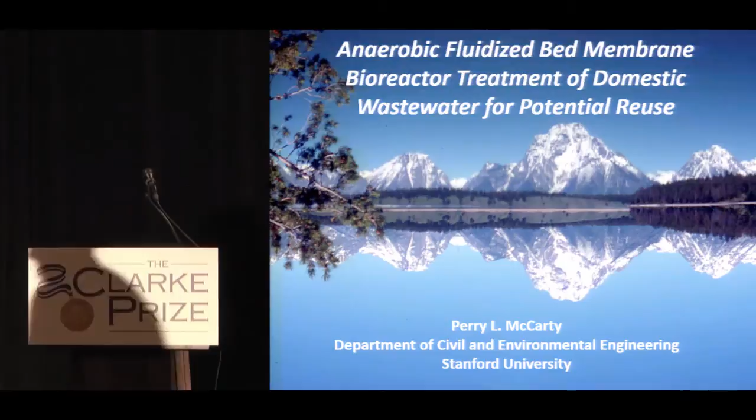Thank you, Pedro. It's certainly my real honor to be here to talk with you this afternoon. I want to tell you about the treatment plant of the future for wastewater. About 3 years ago, I had the honor of being here at the Clarke Prize conference to tell you about the beginning of this study on an anaerobic membrane bioreactor. We had been conducting laboratory studies. They looked very promising. We had started a pilot study on it at that time. And so now we've completed that pilot study. We have others beginning. And so I'd like to tell you about that particular one and where we're moving on this.

So George talked about the paradigm shift, that instead of looking at wastewater as a waste, it's very important in the future because of our limited world resources, growing population, and economic development, that we look on all our former waste as resources. And here we've been talking primarily about wastewater as a resource for water. But that's not the only aspect of the wastewater that's important. George also mentioned the bioenergy.

The aerobic treatment system we have today, and many of the advanced treatment systems that we're having, all keep on using more and more energy. But the reason we're having climate change is because we use so much fossil fuel and so much energy that we've got to change. That's where the big shift is. We've got to stop using energy. We've got to find processes and ways we can reduce energy. In fact, in this one, we produce energy rather than consume it.

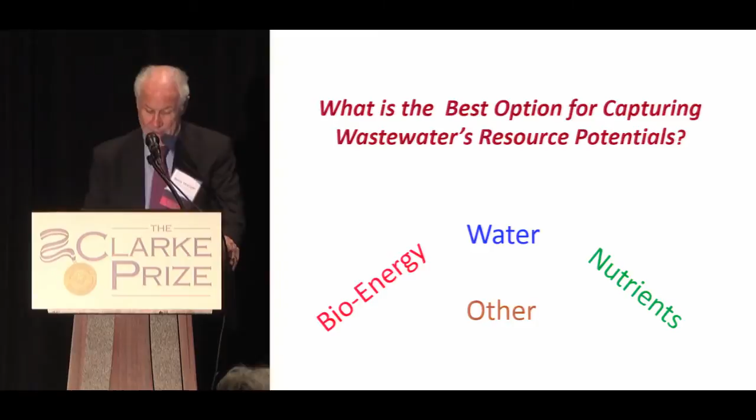Well, the process that we developed was with my colleagues and one of my former students, Jae-ho Bae in Korea, Inha University, who asked me to join with him and put in a proposal to the federal government. They had a program they called the World Class University Program, where they were funding senior people to come and work with them for a 5-year contract, which I did about 2 months a year.

And what is interesting, Professor Kim there, he came with, he's with membranes, and I got one of the students, Chungheon Shin, who's been so instrumental in so much of our work. I just wanted to make sure that his name was on that.

Well, something I'd always been interested in to see, well, we've been making great progress in anaerobic treatment. So now today, if you do an industrial waste, organic waste, a couple thousand milligrams per liter or so, if you don't use anaerobic treatment, you are wasting your client's money, you're wasting energy, and so forth. It is so much better than aerobic processes in all aspects.

But the question is, and the common belief has been, that you can't treat a waste anaerobically unless, in essence, it's in high concentration and at high temperature, and those are requirements that people said in the past. Well, there's a lot of evidence that said that we could probably do better, and the question that we asked is, well, how much better can we go? And can we really, if we make an effort, treat wastewater 100% anaerobically and achieve net energy production, while at the same time meeting effluent quality standards and at a lower cost than conventional aerobic treatment?

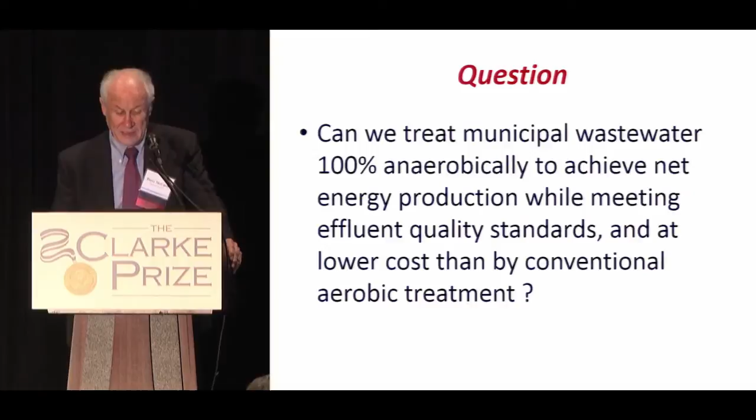Now, the process that I really liked is this one. There's a fluidized bed anaerobic treatment, and in here there's a little granular activated carbon, maybe a millimeter in size. They have recycled the water and fluidized the GAC, so it's floating in there. The bacteria find this is a great place to colonize. Now, the nice thing about that, you get this colony of organisms on the activated carbon, and you can put the wastewater very, very rapidly through, in minutes, and still keep the organisms, all of them, in the reactor. So this is the kind of process we need.

Now, this just happens to show 2 of them, full-scale industrial wastewater treatment plants in Taiwan. I just want to indicate it's a standard technology. There's nothing new here. All we're talking about is using it for a more dilute wastewater. There's several, actually, in Taiwan of this kind.

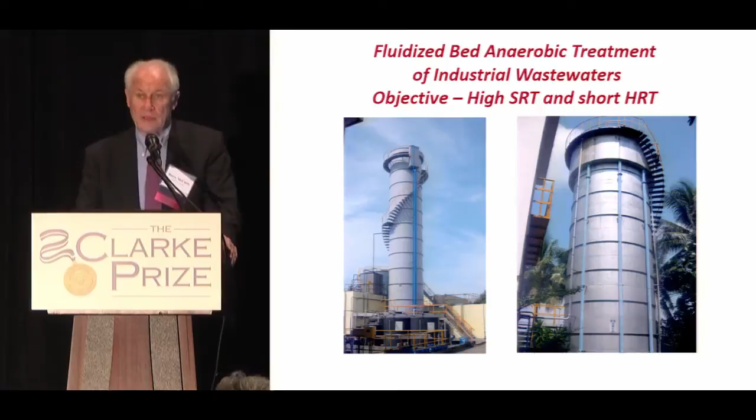So what we propose to do is to put it first, the one reactor on the left, is just that one. It's a conventional fluidized bed anaerobic reactor producing methane, bacteria growing on the little particles of granular activated carbon. And then we took the effluent from that, and since Professor Kim came, we said, well, we'll take one of these and put in some membranes and just see what would happen.

So in the second one, we put in the membranes as shown there, and the granular activated carbon was just rubbing against the membrane as it was being fluidized, and we found that this reduced a major problem, and that is fouling of the membranes, reduced it right away, and at a much lower energy cost than in the traditional ways of using this anaerobic system. So I just want to show a little bit about this.

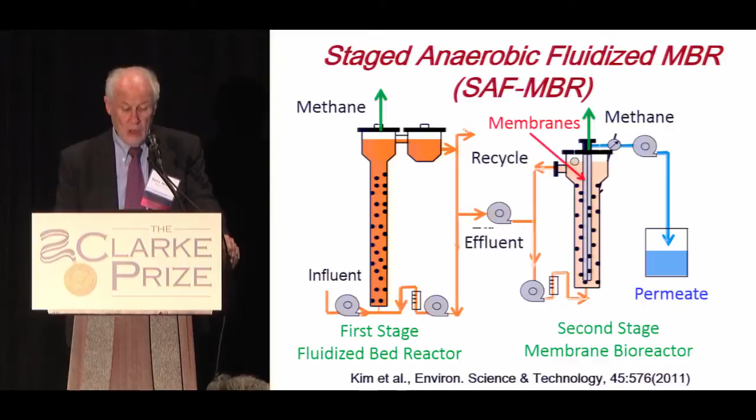Now, what's different here, that was the new concept, was that in traditional membrane bioreactors, they use gas sparging. This is where you put the membranes right in the reactor. And here, in aerobic systems, they use a lot of air. In fact, this is where the big energy cost comes from. A lot of air to shake the membranes. They prevent the fouling by just shaking them real hard.

In our system, which we call particle sparging, instead of putting all that air in, which is very high in energy, we just let the GAC, while it's holding the organisms and treating the wastewater, at the same time rub against the membranes, reducing energy.

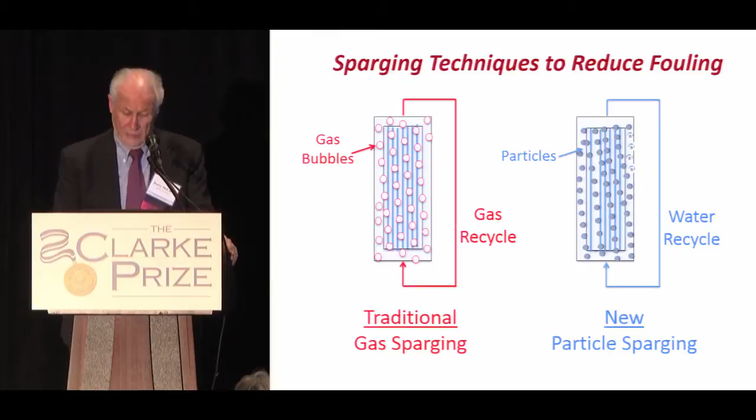So from our laboratory, we then built this at pilot scale in Korea, and the one on the left side there is the first reactor, the fluidized bed reactor with just the GAC in it. And the middle reactor is where we put in hollow fiber membranes with the GAC. So that was the second reactor.

Now on the far right there we just opened up the front of it so you could see the hollow fiber membranes inside. So in that reactor, we had GAC up to about the 50% point, and then we fluidized it to cover all the membranes.

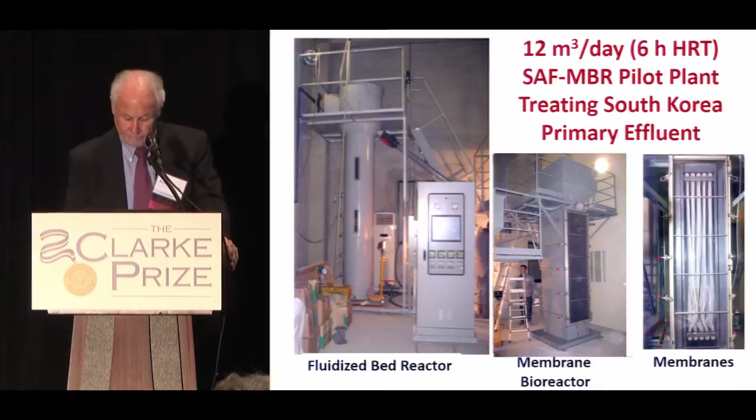We treated this waste at the Busan wastewater treatment plant in Korea. It's a very large treatment plant, and we took the primary effluent. So we're treating just the primary effluent. It had a COD about 300 and a BOD around 160.

And in the first reactor, we used a 2-hour detention time. And in the second one, we started about a 2.6-hour retention time. We ran it for 2 years. And over that period of time, we had no chemical cleaning. Now, chemical cleaning is a typical thing to do maybe once a month or so in an aerobic membrane bioreactor. We hadn't designed the reactor to find out exactly how to do that, so we ran it for 2 years

without any chemical cleaning. And during that time, the fouling got such that we had to reduce the flux through the membrane, so we increased the detention time. Nevertheless, the total detention time we're talking about is sort of in the 6-hour range, which is typical of an aerobic treatment system. The flow rate through the reactor here is about 12 cubic meters per day. So what do we get?

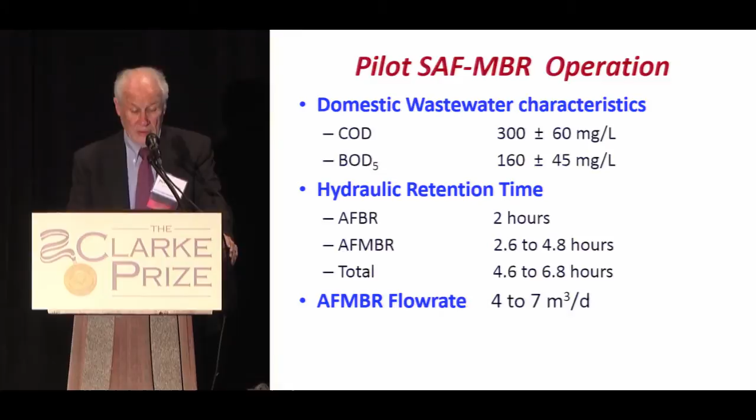Well, in Korea, this is the wastewater temperature, and it varies. At the top of this slide, you'll see a temperature range. So in the first little part, when we started, it was the wrong time to start an anaerobic system because winter was approaching, and the temperature of the wastewater dropped from 20 to 15 degrees. But we were just starting up the reactor. It takes a long time for the organisms to grow. Anaerobic organisms have a very long doubling time, especially when the temperature is lower. But nevertheless, probably a lot of this was initially some adsorption because we were getting almost 85% on average.

And then it dropped to winter. Temperature at the top you'll see is 14 to 8 degrees. We're getting about 85% removal. And then we come to springtime, temperature 15 to 25. We started getting increased efficiency, 90%. Summertime came in Korea, it's 26 to 32, and you see now we're getting 97%. Well, the summertime is required for the organisms to grow fast, get attached to the GAC in a nice large culture of organisms, and we got efficient removal.

Well, then we come to the next fall, and you see we're getting over 95% removal, and even in the winter when the wastewater temperature got down to 9 to 13 degrees, we were still at about 93% average BOD removal. So we see once you get it acclimated, even in the wintertime, which was actually a very big surprise to me as well as to all of us, we could still get such an efficient treatment process.

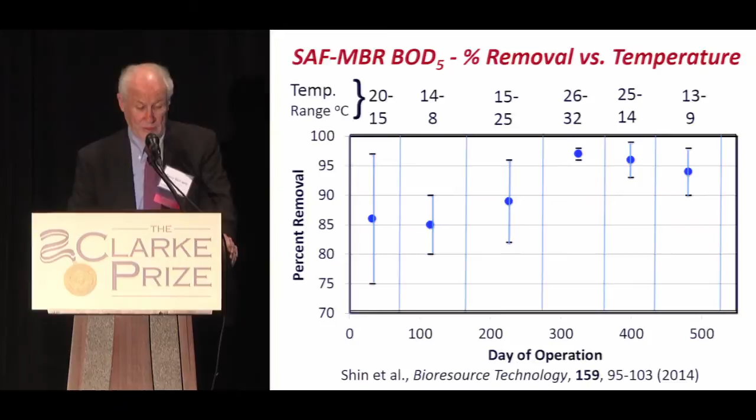And if we look at the effluent BOD, we can see the EPA standard here, the 30-30. Well, even when we started, we met that most of the time. But by the time we adapted through that first summer, and then went into the fall and the winter, we see over on the far right side that even in the wintertime with temperature in the 9 to 13 degrees, we still only had around 8 milligrams per liter of BOD in the effluent. So this is a very good quality effluent, short detention time.

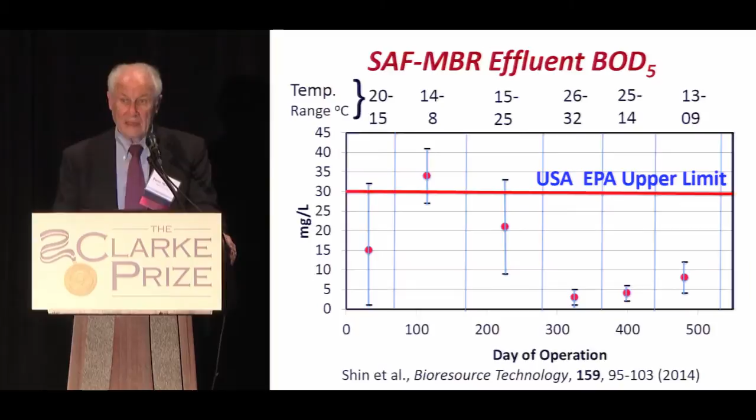So this is one of the big things. This is an energy neutral system, not putting any energy into it, and we're getting that kind of removal. But one of the biggest cost savings from this system is shown here in the biosolids production. Shown here, the anaerobic on the left, the aerobic on the right. Now they were both doing primary treatment, so the amount of sludge from primary treatment, shown in the blue, is about the same. But it's the secondary treatment.

Since most of the energy in the organics goes off as methane, there's little for the organisms to grow. So organism yield is very tiny. And the main problem with activated sludge is all the waste biomass produced. And it's very fluffy, it doesn't settle very well. We can see maybe about a quarter or 1/5 as much biosolids produced in that secondary process. So overall, anaerobically, we get about half the biosolids. In a normal activated sludge plant, biosolids handling is often talked about as being 40 to 50% of the cost. And here we've cut that in half. So I think this is one of the big cost savings besides energy.

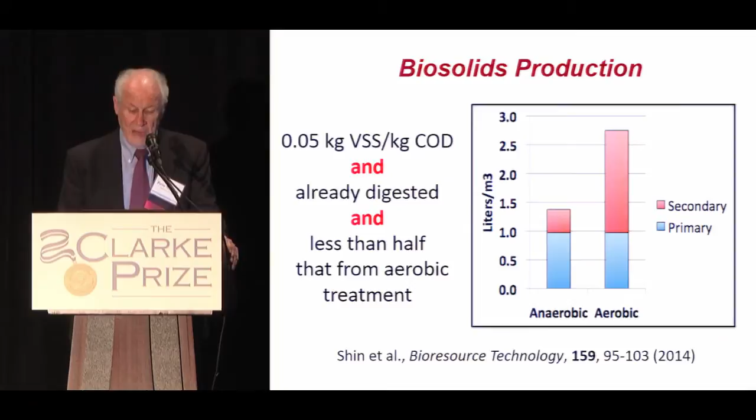Another surprising thing: Mitch at Stanford and Dave Sedlak at Berkeley were interested in looking at pharmaceuticals and contaminants of emerging concern, and what happened in the anaerobic systems, which obviously would be worse than aerobic. So from the full-scale, highly efficient aerobic plant at Busan, we got samples of the effluent there and the samples from here.

We got 96% median removal of the pharmaceuticals in the anaerobic system and only 76% in the aerobic. This is confirmed by some colleagues in Taiwan independently. Well, they did a similar study with the ones they found, and the simplest thing, we don't quite understand why it's removing. We've got a speculation, we've got to find out, but it was obvious when we look at trace chemicals of this kind, the anaerobic is doing very well.

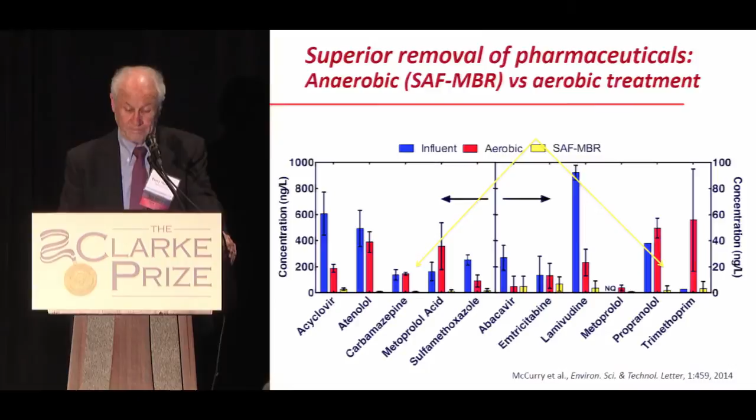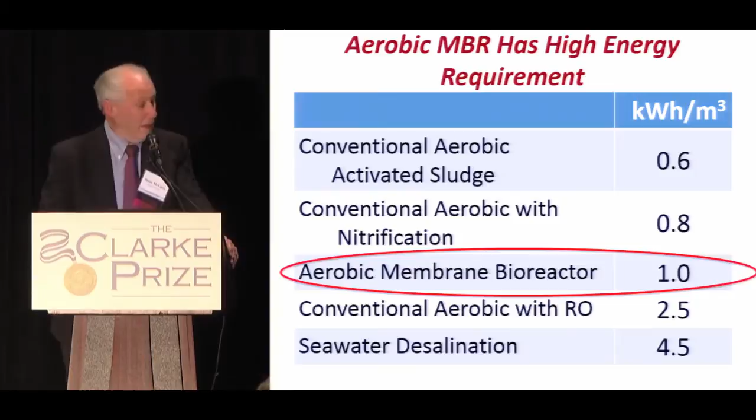I just want to compare, this is an anaerobic membrane bioreactor. If we look at aerobic membrane bioreactors, because it takes so much energy to keep the membranes from fouling, it's about 1 kilowatt hour per cubic meter. And what we were finding in our system is shown here. For the anaerobic MBR system, we see the energy requirement. The fluidized one, first one, hardly used any energy, certainly less than a tenth.

But the anaerobic membrane bioreactor, and this is primarily to fluidize the GAC, was about 0.21 for a total of about 0.22. So about 22% of what we had for the aerobic system. But the energy, the methane that we produced and converted to electricity. Now this is how much electrical energy we're talking about. And we take the methane that was produced and burn it, convert it into energy. It would give us about 0.13, not quite enough.

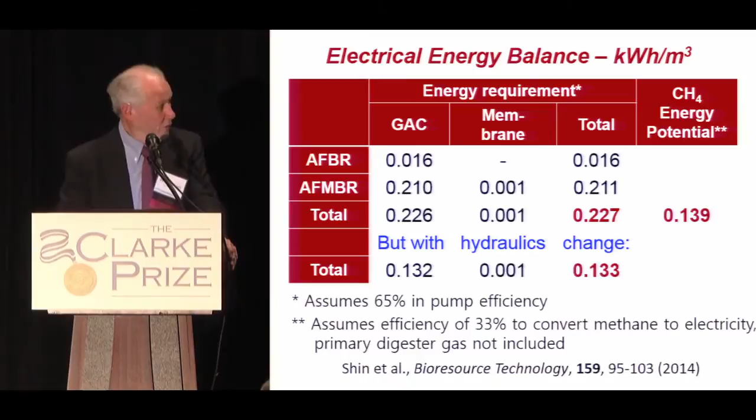But if you take the methane from all that primary sludge, we would double that amount of methane so we could more than make up for the requirement. However, we found that the reason it was so high in the fluidized bed reactor was because the recycle line we had was too small in size, and we were losing a lot of energy in recycling through that. So by increasing it, which we have now done, we expect the energy requirement will be quite a bit less. So this may be only 13% of the energy required in an aerobic system, and at the same time we're producing energy, so we have a surplus of energy.

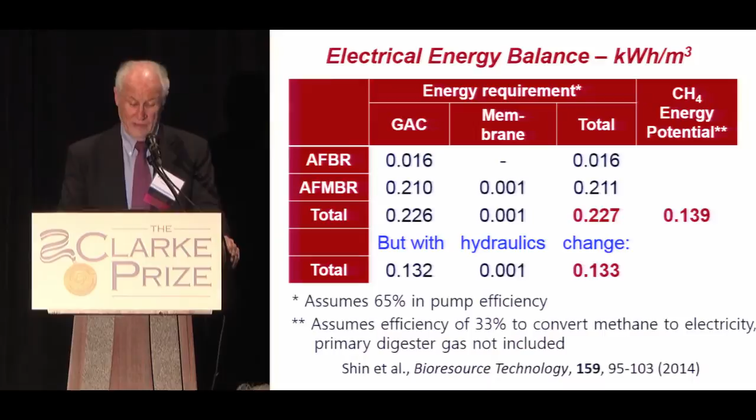Another interesting thing, some of my colleagues at Stanford looked at this and they said, well, now you're producing twice as much energy, you're getting electricity from it, only about a third of that energy in the methane goes to electricity, 2/3 goes to waste heat. So you've got twice as much waste heat in your system, and the biosolids are cut in half. So we got more waste heat, we got less biosolids, and they figured out you could dry it.

You could essentially get dried biosolids. They said if you burn it in a treatment system, you could even get more energy because it's already dry, or you could have a very small amount of biosolids to get rid of. So this is another huge advantage of that system, which reduces the cost.

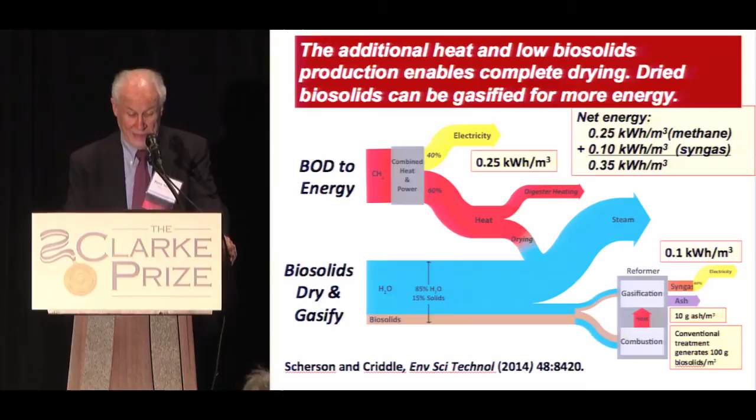The interesting thing in the fluidized bed reactor compared to the gas sparged, where you have all the organisms mixed together, is this. The reason we need the membrane when we're dealing with wastewater is the volatile suspended solids, not the soluble organic material, but the volatile suspended solids that come into the reactor. They're very light, they're small, and they are mixed around in the system. They're not part of the granular activated carbon. They're not part of the bacteria. And they're circulating around through the system.

Well, you notice here on the lower right, in the red, that's where we waste our biosolids. It comes from there. And we don't waste the organisms. We waste the biosolids. We can waste the biosolids independently of the organisms in any way we want.

Now, to make this thing efficient in the wintertime, you have to have a solids retention time of the organisms, if you know that concept, of maybe in the range of 100 days or so to get good efficient treatment. If you had all these volatile suspended solids in there and they had to remain at a high concentration, you'd have a much higher concentration of biosolids in the reactor. We only had in the suspended material about 500 to 1,400.

This typical anaerobic system, they have 10 times that. And if they made a short detention time like we have in here, hydraulic retention time, it'd be even higher. That affects the viscosity, that affects the energy requirement, affects membrane fouling. And so this is another advantage in this particular system.

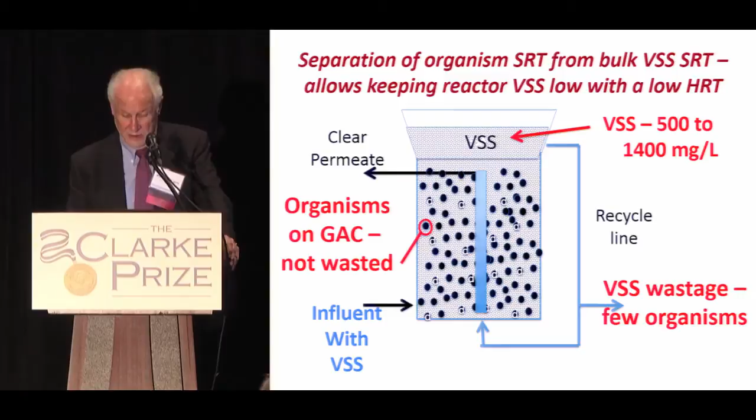Now another disadvantage I want to show is something we've got to face yet. And here's a COD balance, because that's important to know what's happening here. One thing you can see, you've got sulfate reduction. So if you got sulfate in there, the sulfate's going to be reduced to sulfide. It's going to oxidize some organic matter, and that won't go to methane. So you lose some methane depending upon how much sulfate you have.

But you'll see that under these very dilute conditions, in the wintertime, in the cold time, gas is more soluble. In the wintertime, over half, maybe 60% of the methane that's formed is in the dissolved phase. So when it comes out of the reactor, it's there. We've got to get it out of the dissolved phase. That's something we have to do yet. And only about 40% comes out as a gas.

Now in the summertime, it's just about reverse. We've got about 60% in the gas with the concentrations that I'm talking about here. So we're going to put in some energy. We're going to lose a little bit of energy getting that methane out, but there are several processes that are possible to do that, and that's somewhere we need to go.

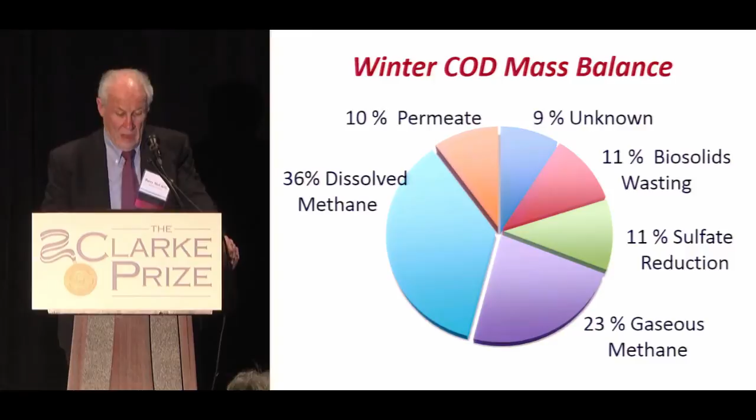Well, here's just a summary of the advantages of anaerobic over aerobic. And we see that it's energy neutral. We get half the biosolids production. We get enough heat and less biosolids so they can dry the biosolids. We get high removal of organics. And I want to show you one other thing which I want to emphasize is important.

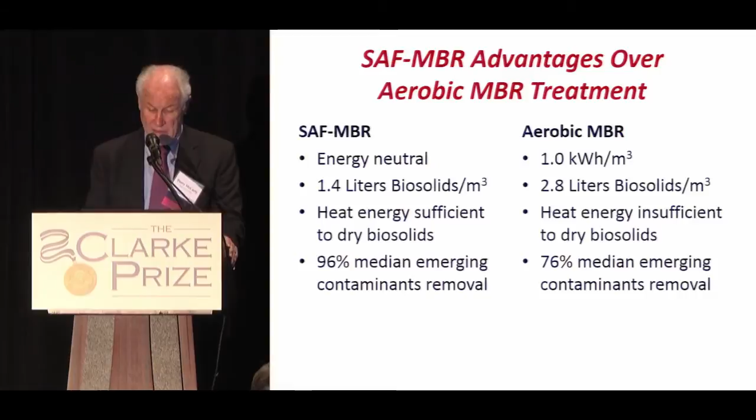And here is Monterey County. You notice this is one of the best agricultural lands in the country, a major producer of vegetables and fruit for the country. It's right on the ocean, and by overusing groundwater, they got seawater intrusion. So how are they going to grow these wonderful crops that they do? And so they put the Monterey County treatment plant right there in the middle of the agricultural area.

And with this, they just had a conventional aerobic system with filtration and disinfection, and that water they could put on the crops. They put it on artichokes, strawberries, lettuce, celery, broccoli, things that you eat raw, and it's a safe thing to do. It's been approved by the state. Watsonville has expanded, and you go there and see strawberry patches all around. The strawberries you're eating, if you ate any here, you probably got them sprayed with the sewage from up there, and very tasty.

But the one thing you find here is that at this plant, they do take their biosolids and they digest it with cogeneration. With that, they get about 50% of their energy. The other thing is, they don't have to nitrify. And so what they do is add to the crops the nitrogen and phosphorus. Now, I indicated the problem with nitrogen and phosphorus is another important one. Here, they're using them back where they should be using them.

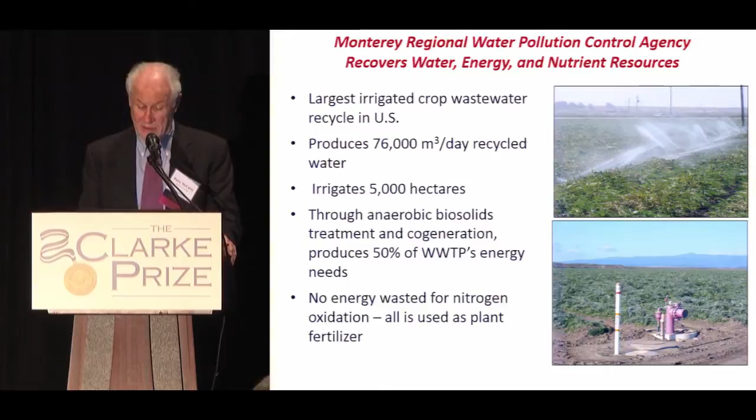And I want to show at Stanford University, we are now building this particular, what's called Codiga Resource Recovery Center at Stanford University. It's so hard to get any money in the United States. We have to go overseas to get all our studies done of this kind. The United States government and so forth will not give you any money for such things as this. But Stanford University sees the value of it here in California, where we need to reclaim all the water we can. So this is connected right to the Stanford sewers coming from the students and the faculty housing.

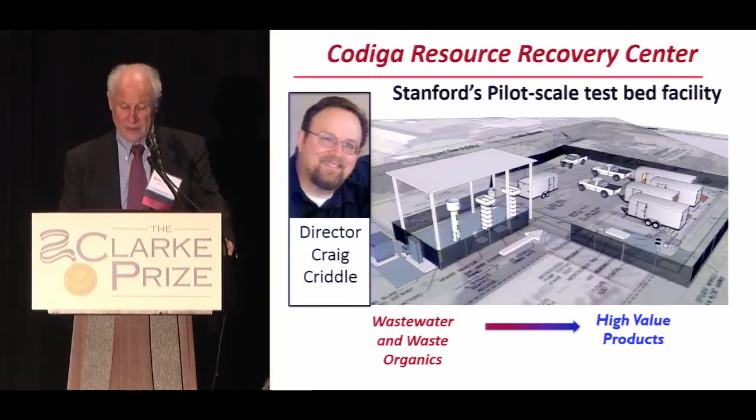So in conclusion, I just want to say complete, efficient anaerobic MBR treatment of domestic wastewater is now possible at wastewater temperatures certainly as low as 8 degrees Celsius. It produces energy instead of consuming it. It reduces biosolids production, it reduces footprints, and it removes trace organics much better than an aerobic system.

Anaerobically treated wastewater reuse in landscaping and agriculture, where we can use the nitrogen, is I think one of the cheapest ways to go. And while everybody wants to ask me about how you're going to remove nitrogen and phosphorus, I say, well, we'd like to find out how we can capture them, not remove them, not throw them away. I think that's important for us in the future if we can't use it on agricultural lands like they're doing in Monterey. In any way, we don't have to use organics to get rid of nitrogen because the Anammox process doesn't require organics. It requires only about 40% of the traditional aerobic denitrification systems, and so there are other approaches there as well.